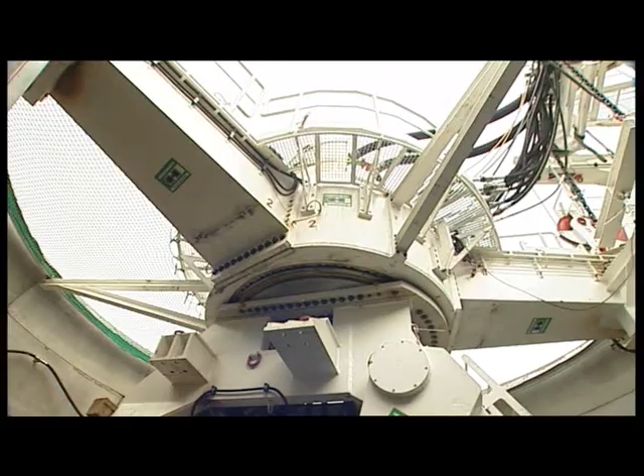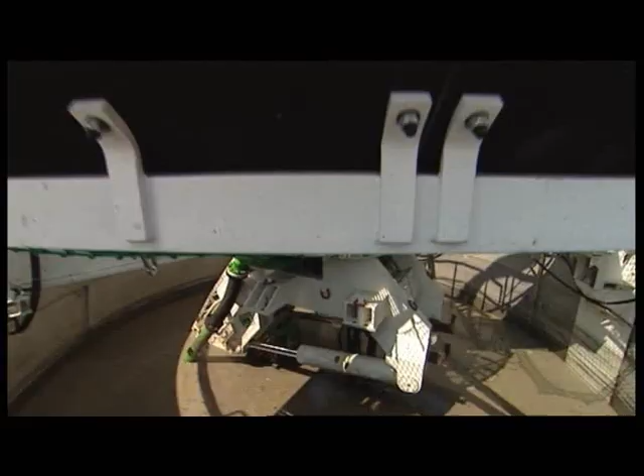Deep shafts often encounter difficult ground conditions, such as high groundwater pressure combined with layers of hard material. There is an increased requirement to avoid dewatering during construction of shafts to avoid the associated settlement, which can affect a wide area.

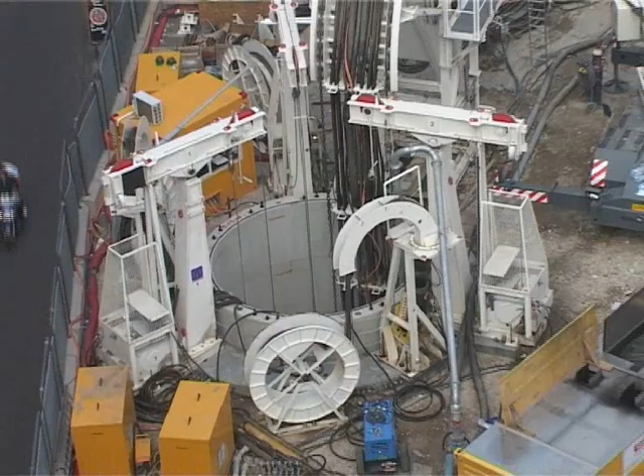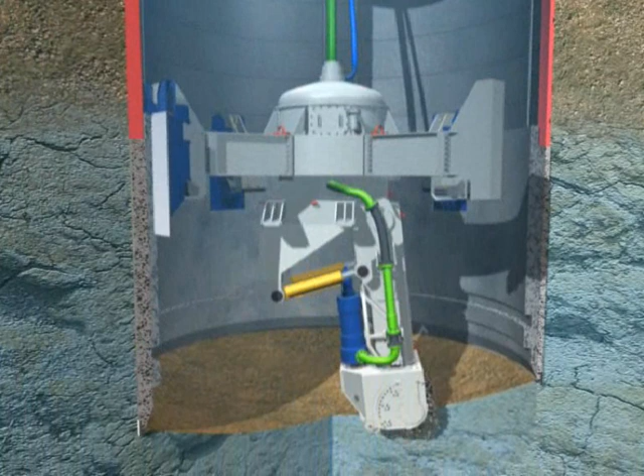The following animation will show how the Herrenknecht VSM shaft sinking equipment can install shafts quickly, safely, and economically in difficult ground conditions and in inner-city areas with limited space available.

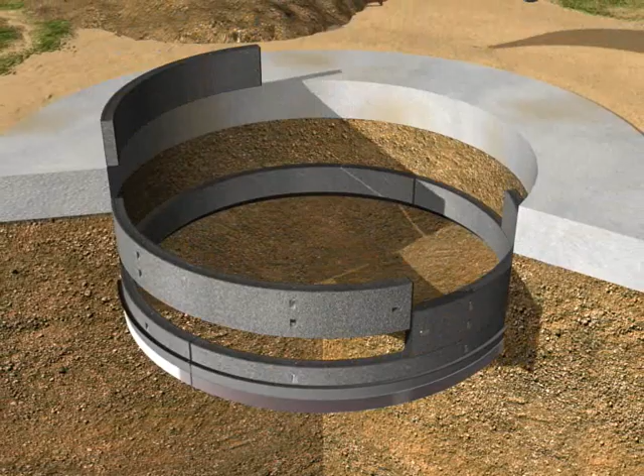The initial section is excavated, 1 to 2 meters in depth. A support concrete ring beam is installed. It acts as a guideway and takes the forces from the shaft sinking process. The first segments of the shaft are assembled and lifted in place. These segments have an integrated steel cutting edge, which will act as a knife during the shaft sinking.

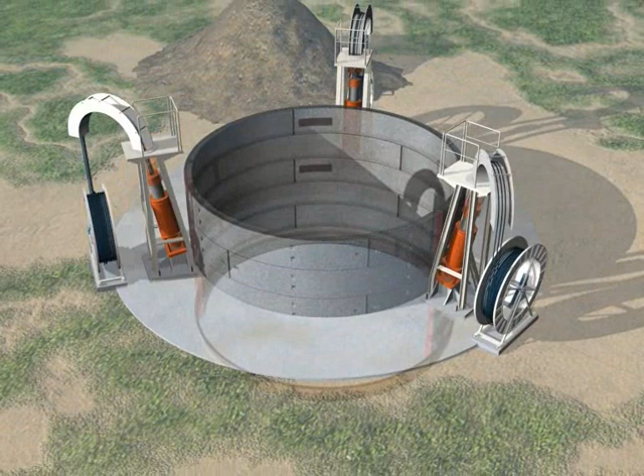Strand jacks are installed on the support concrete. Strand wires are connected to the first segments. The number of strands corresponds to the total weight of the shaft. The shaft is now held in position by this compact strand jack system.

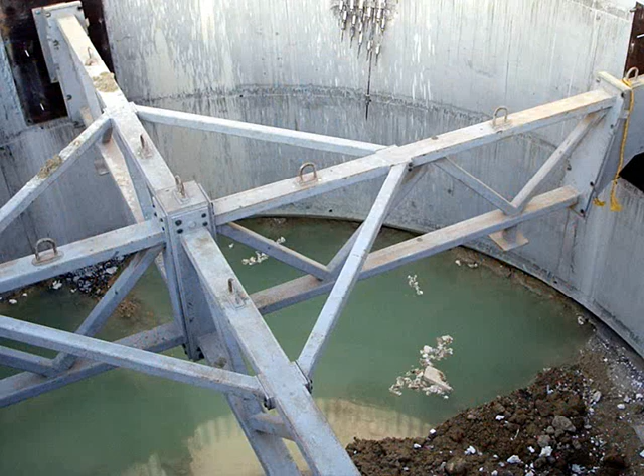Preparation for the machine installation starts by using a dummy frame to position the attachments for the machine, which are then welded to the steel plates cast into the concrete segments. The VSM machine is assembled to suit the shaft diameter and lifted into the shaft by a mobile crane and fixed onto the attachments.

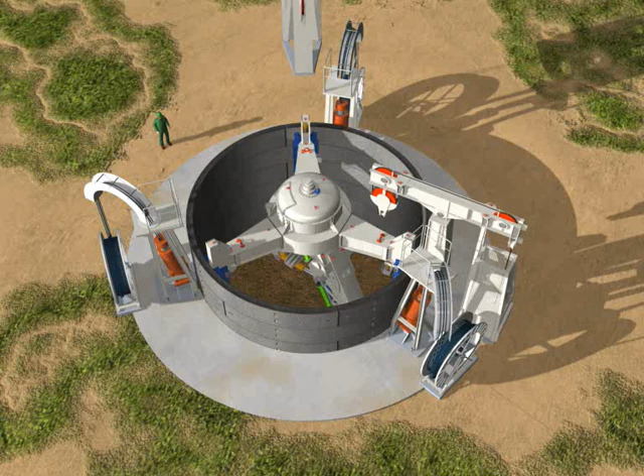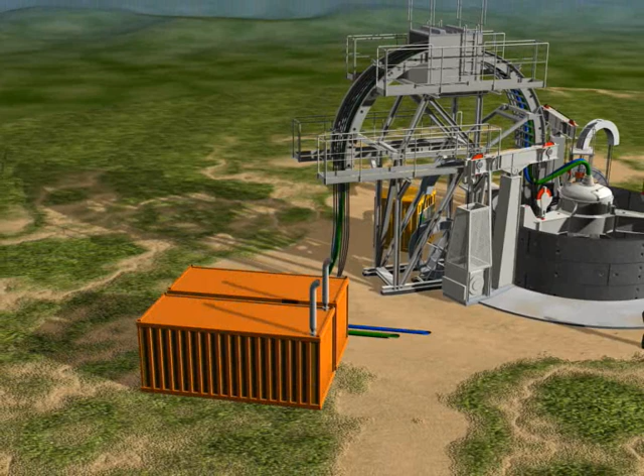The rest of the shaft sinking equipment can now be installed. 3 winches are for lifting and lowering of the machine, for maintenance during shaft sinking, as well as to lift it out when the shaft is complete. The energy lines supply the machine with all necessary power and communication. This is an example of a complete site setup.

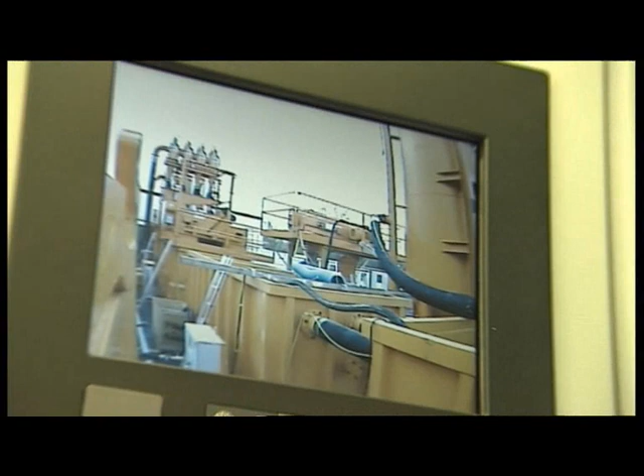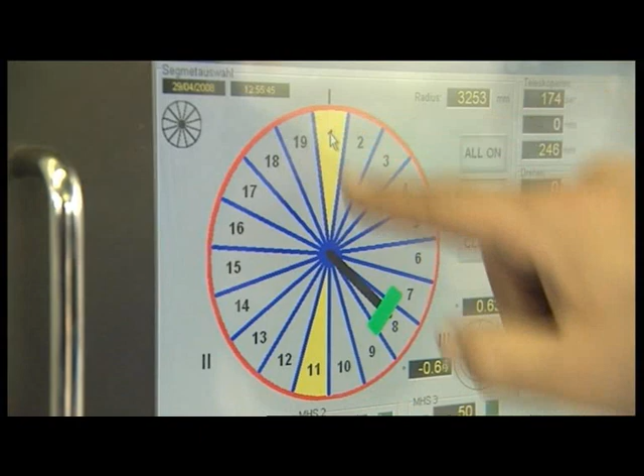All operations are powered and controlled from the container on the surface. Stored data, together with the position of the cutter boom, is shown on a graphic display, giving the operator full control of the excavation and sinking process. The cutter boom can either be controlled manually by the operator or set in automatic mode for cutting the set profile in a required section.

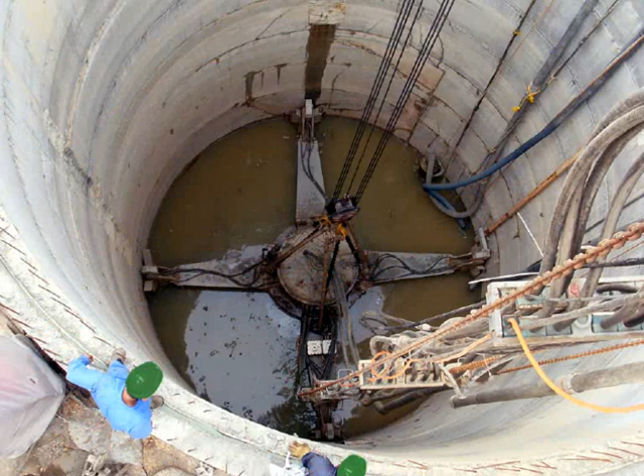The shaft is kept full of water during sinking to balance the level of groundwater in the surrounding ground. Various depths of the groundwater level can be handled. The flexibility of its telescopic arm rotation and slewing movements allows the cutter boom to work in shafts with between inner diameter of 4.5 and outer diameter of 11 meters in water depths up to 80 meters.

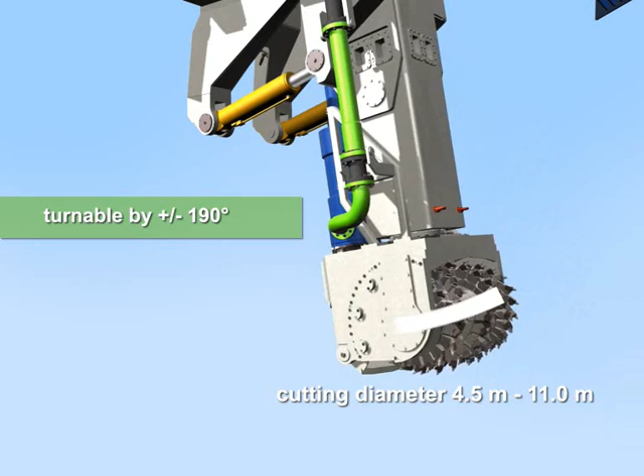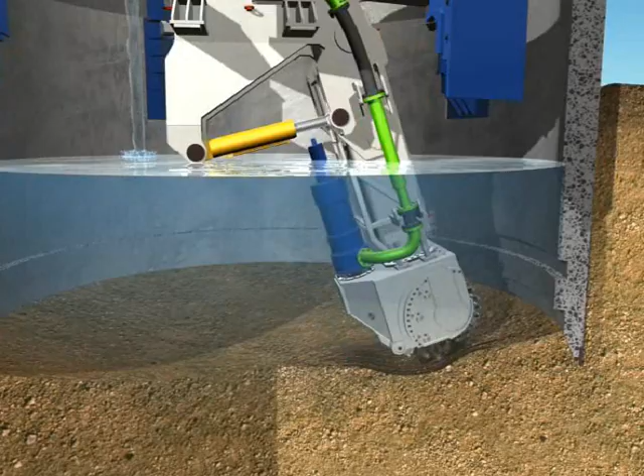The cutting arm moves radially from the center to the outside of the shaft. In soft soil, the cutting edge on the shaft is able to trim the excavation as it sinks into the ground. The cutting speed and the movement of the boom can be varied to achieve the best excavation rate. When it is necessary to excavate under the cutting edge, the machine can be fitted into an alternative position that is 1 meter lower.

Where hard soil is encountered, the machine cuts out to the program limit all around the circumference before the shaft is lowered. In rock, this controlled descent allows all of the cutting edge to be cleared before lowering. This avoids either trapping the cutter boom or causing the shaft to deviate.

A slurry circuit transports the excavated material from the shaft to a separation plant on the surface. The cutter drum cuts and crushes the material to a granular size that can be handled by the integral pump. In sticky ground conditions, an additional high-pressure feed line can clean the cutting drum. The separation equipment is selected to suit the local soil conditions.

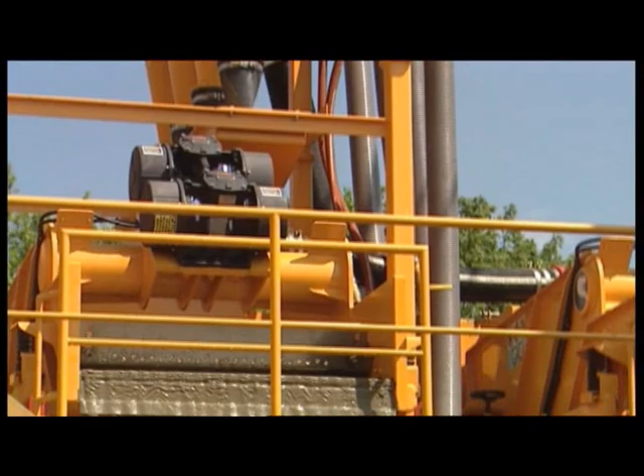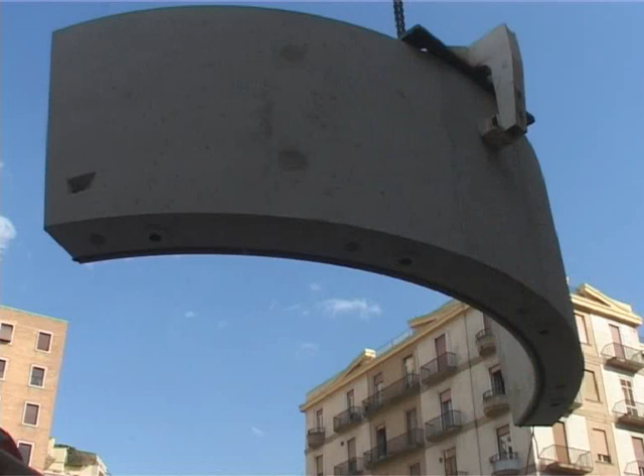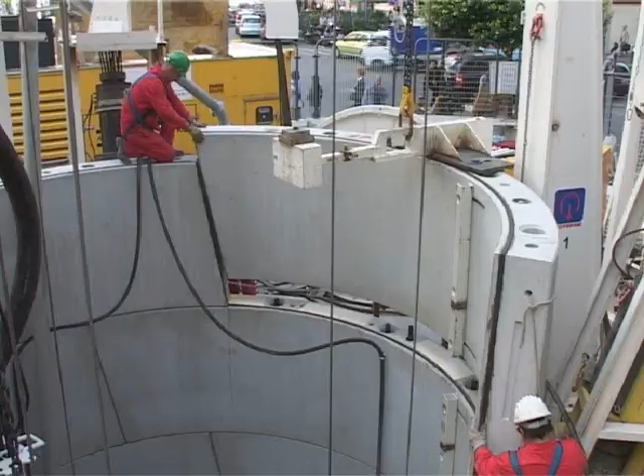Precast concrete segments with rubber sealing gaskets are bolted in place on the top of the shaft. This can be done at the same time that the machine is excavating in the bottom, so the shaft sinking can go on continuously. The molds for the segments are also supplied as part of the shaft sinking equipment package. Segment dimensions are designed to suit the shaft's purpose. The daily sinking production is in a range of 1 to 5 meters, depending on the diameter, geology, and working hours.

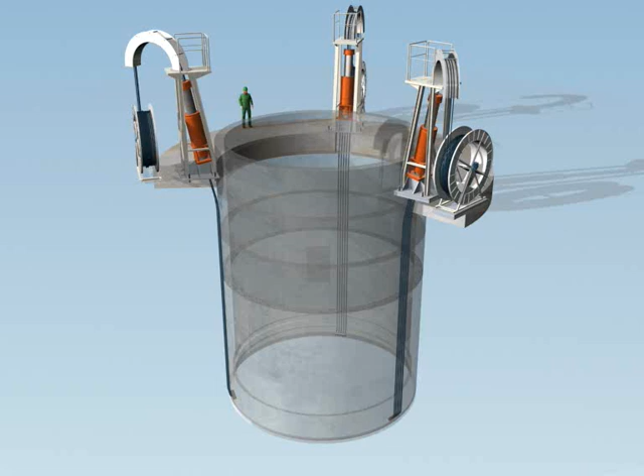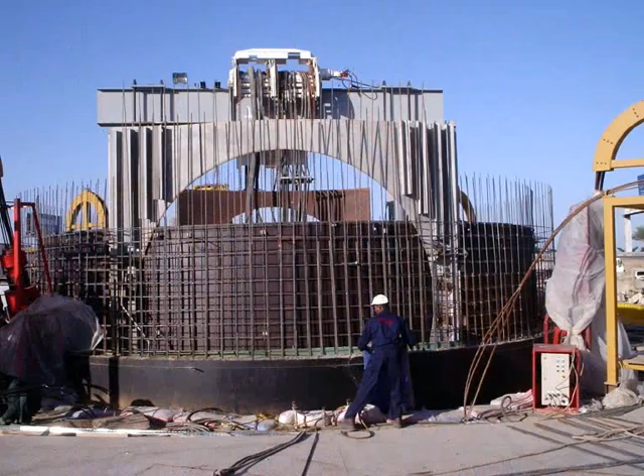As an alternative to using segments to form the shaft, in situ concrete can also be used. Formwork designed for the shaft diameter is used to concrete the shaft lining in lifts of about 2 meters in height. The sinking process is the same as for shafts constructed with segments. This can be an advantage, for example, when the shaft is used to launch utility tunneling machines. The shaft wall can then be prepared with a built-in launch eye to suit exactly the tunneling equipment.

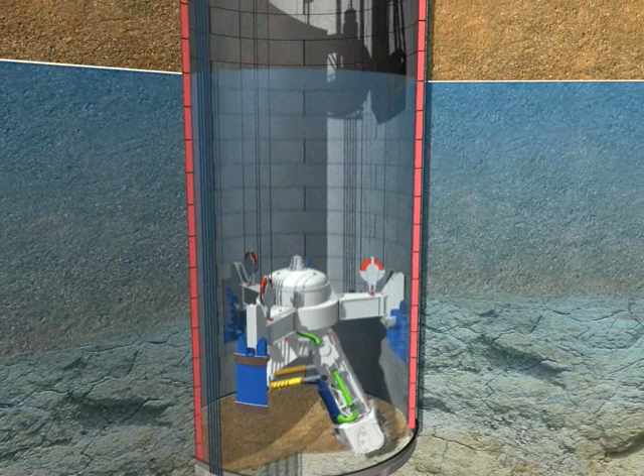An automatic lubrication system reduces friction during shaft sinking. The total number of nozzles is designed to suit the soil conditions. When the shaft is sunk to the required depth, the VSM machine is removed and the base plug concrete is cast. When the base concrete has gained sufficient strength, the water can be pumped out. The shaft construction has been completed without affecting the groundwater or the surrounding soil. The shaft is now ready to be used.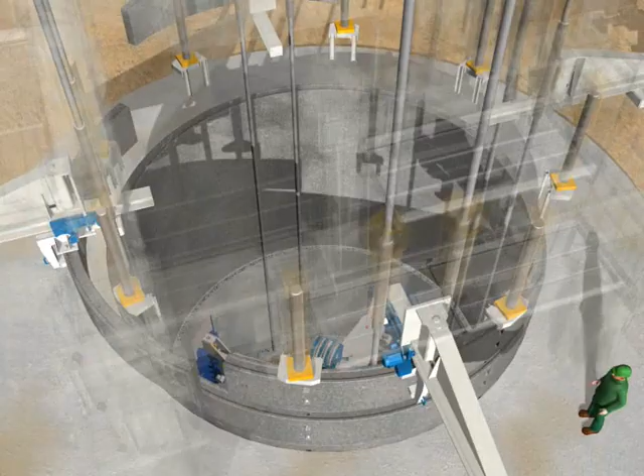History. Up till now, our VSM technology has been deployed for several applications. Here are some examples. For shafts up to 80 meters deep in St. Petersburg, Russia, the design also included the facility to push with up to 2,000 tons due to expected big boulders and complicated geology. The design is like a factory for continual production, and this was used for a number of shafts in Moscow.

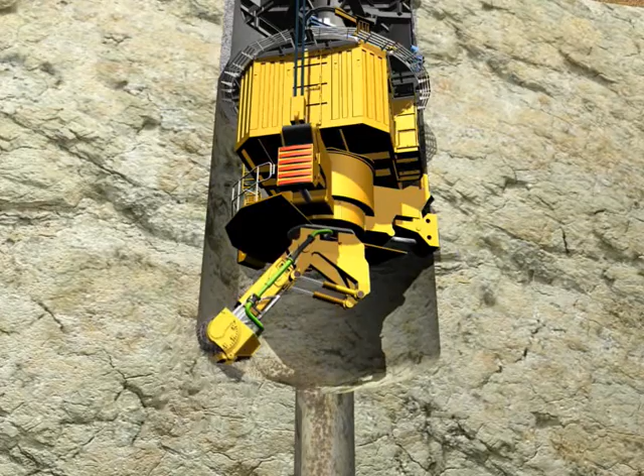A machine has been built for dry excavation in soft to medium hard rock. The design includes a VSM machine in the bottom, rock bolting, and shotcrete sprayers above. Blind sinking procedures will be developed further, so in future various combinations can be used for the best technical solution.

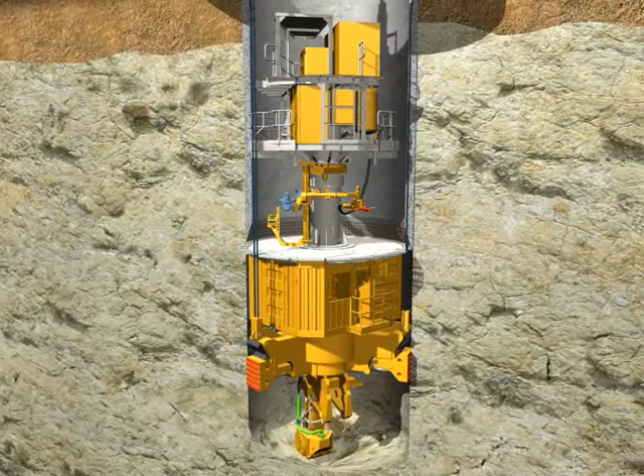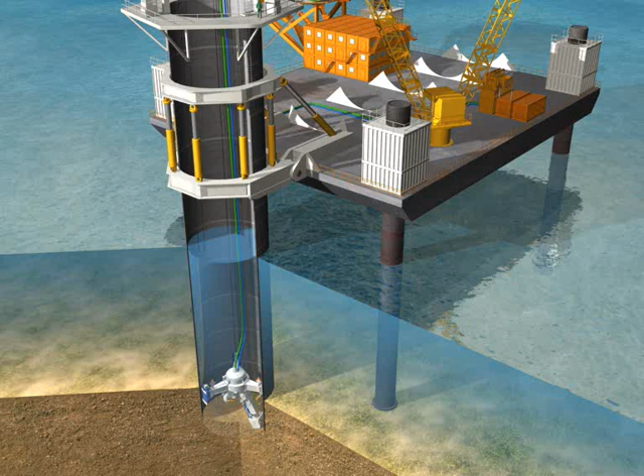Applications in the future. The modular design of the shaft sinking equipment facilitates easy integration with the existing offshore equipment. This will provide new opportunities to install foundations for alternative energy projects and wind farms, bridge foundations, and other sea-bottom installations, also subsea mining.

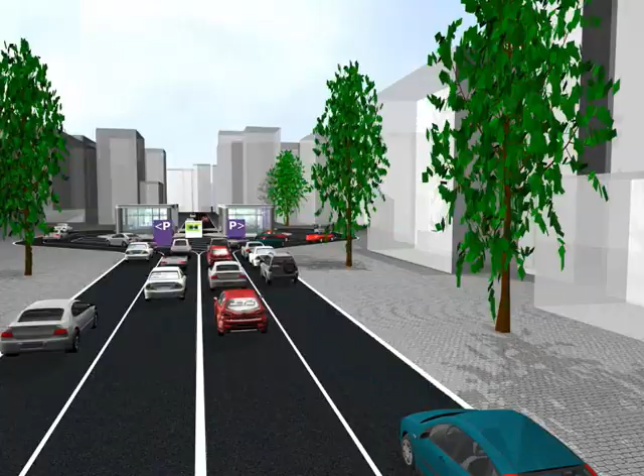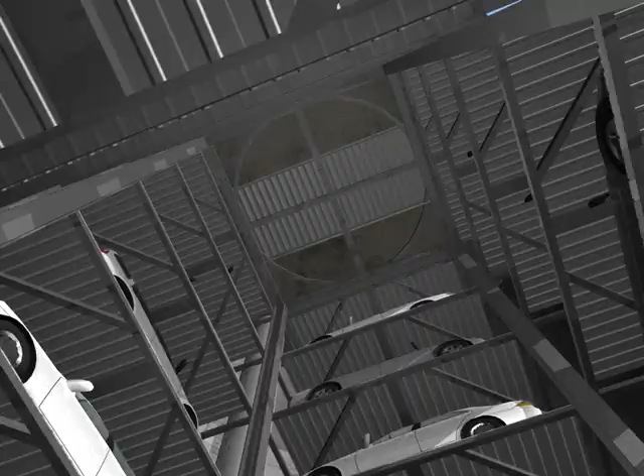The combination of automatic parking systems and deep shafts offers a very interesting parking concept for areas with restricted available space. On the surface, the car will be handed over to an automatic shuttle system. This takes care of a fast and reliable parking procedure.

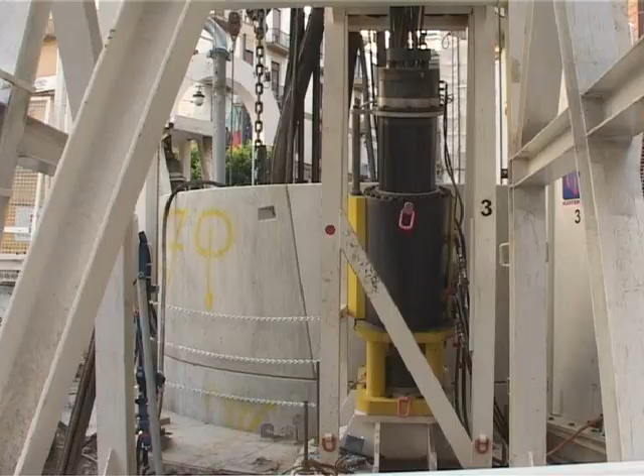The compact design, the possibility to separate the equipment to different locations, the production speed and economy are reasons for choosing the Herrenknecht VSM technology. Herrenknecht will continue the development of the VSM technology so that it can be used for more applications in a safe and environmentally friendly way.